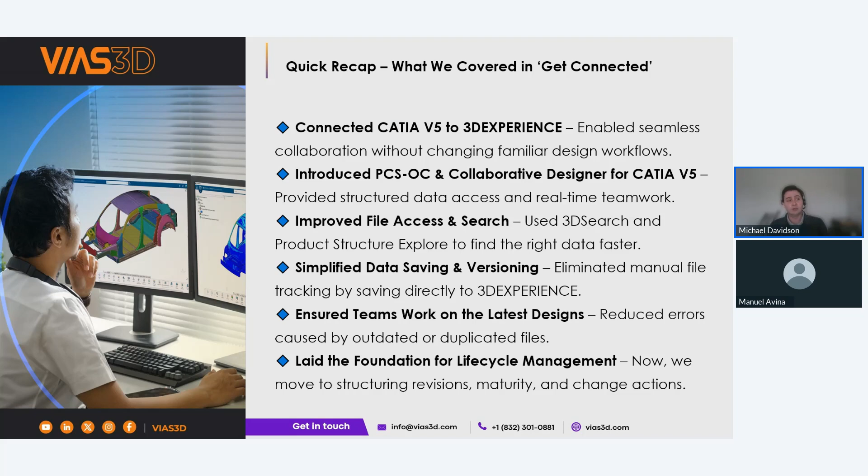You don't necessarily need to answer that or put it in chat, but I would encourage you to consider what that means - individually or as a team - how much time on a daily basis you spend searching for the right file, verifying it's the latest version, or fixing mistakes caused by outdated information. It could be anything from sending emails and waiting on responses, to IMing somebody to verify they have the right file.

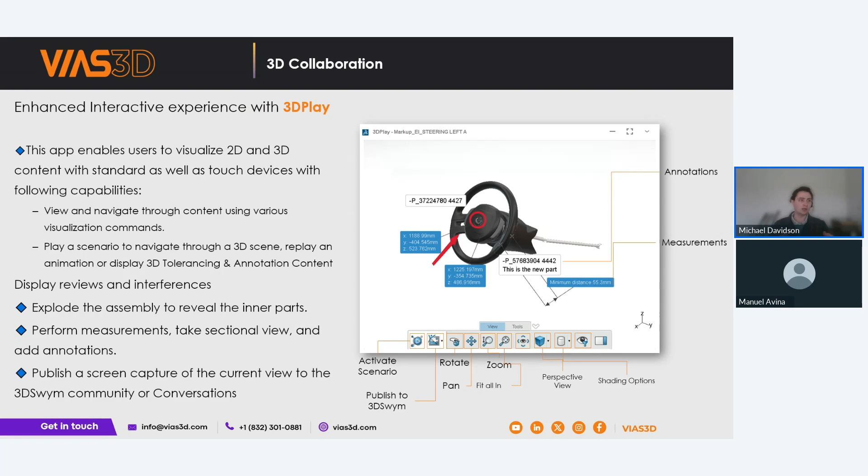So next up, we've got a short video, about 4 minutes. There's no audio to it, so I'm just going to play it and then speak to it. It's meant to demonstrate a very simple workflow related to lifecycle management.

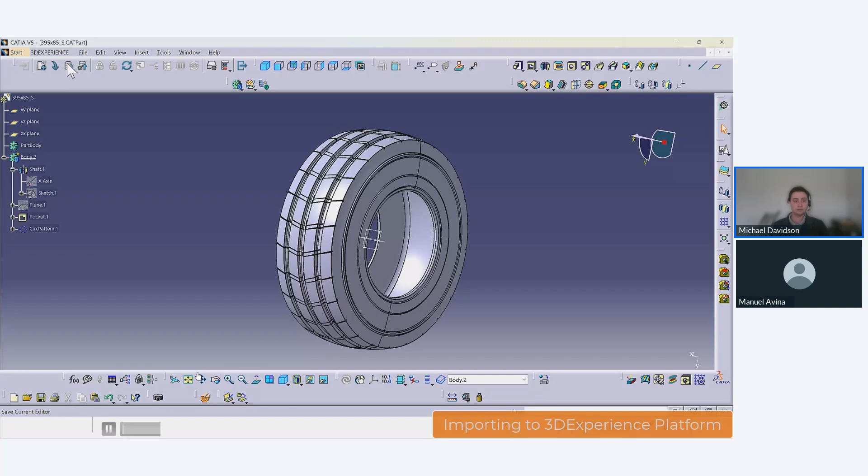It's going to begin in CATIA V5, where you're saving your data, and then it goes to the platform.

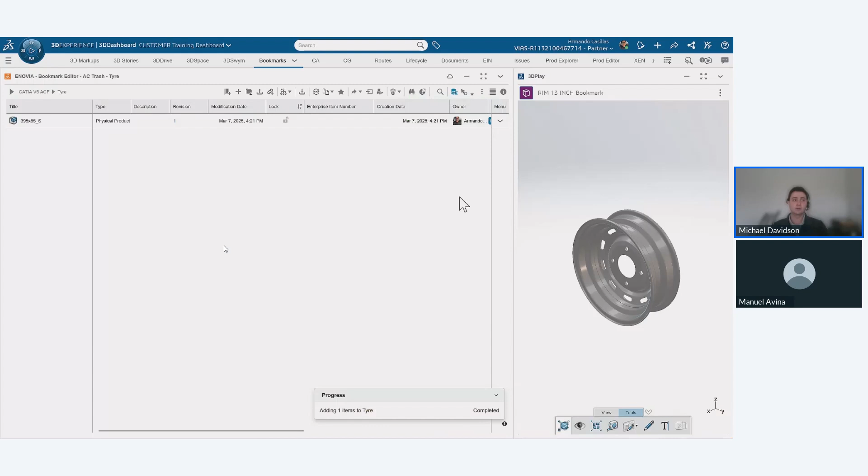When you're in the platform, you can use something like bookmarks, which gives a structured approach where you can control access to different levels of the folder structure. Then you can drag the model onto the 3DPlay widget, and a user can navigate this model and view it in this lightweight widget.

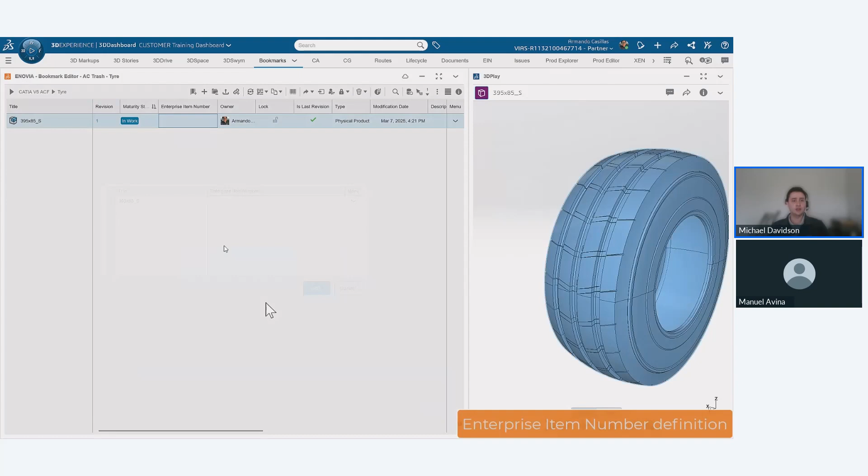If you have the right permissions, an engineer can make some attribute adjustments here in the platform, like adding an enterprise item number.

Then when they start their work, if they want to track and manage assignments, we'll show the collaborative tasks widget, where we create a task, add a description, add some other attributes, and then search for the model and add it as an attachment. This is the actual model on the platform, not a duplication.

They could add an assignee, add any supplemental documents or other things needed for context, create the task, and move it to 'to do'.

If we go to the assignee's account, we see that they get a notification that they've been assigned a task. They can open the task, see the description, all the information added, and the model that was attached.

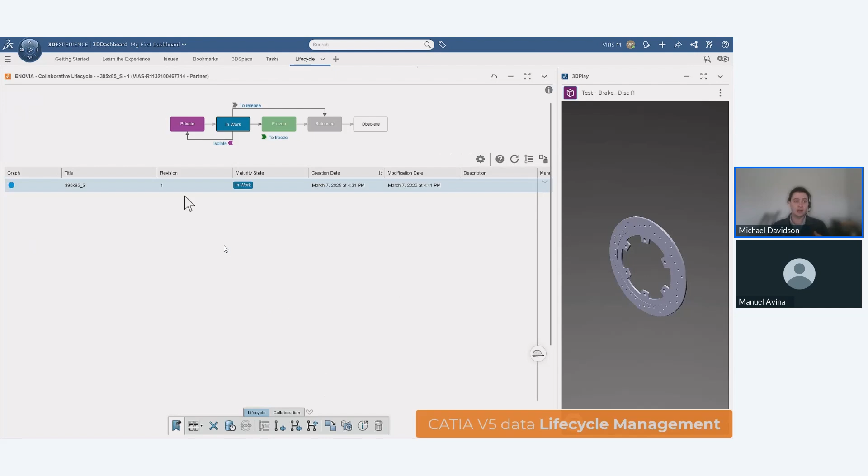They want to start work, so they move it to 'in work', and then we'll use the collaborative lifecycle widget to demonstrate some of the maturity states.

Here we've got revision 1 of the model. Let's say it's released, and we want to make an update, so we create a new revision, add a comment about what we're doing, and now we have revision 2, created as an in-work model. Now we can open it.

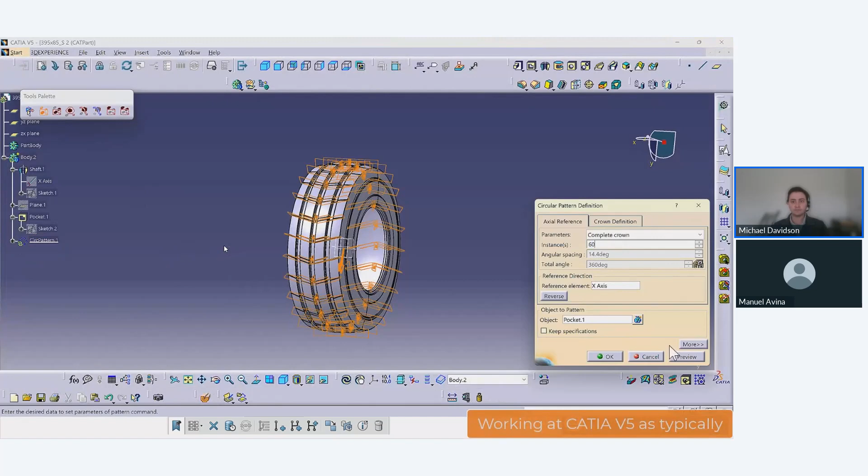We can open it directly back into CATIA V5. The part opens in V5, back to our familiar interface and the workflows we know, where we can make any updates needed. In this example, we'll just change the tread pattern of the tire.

Once we're happy with it, we save it, and it saves back to 3D Experience. Then we'll return to 3D Experience, and with a refresh, we can visualize and look at the changes.

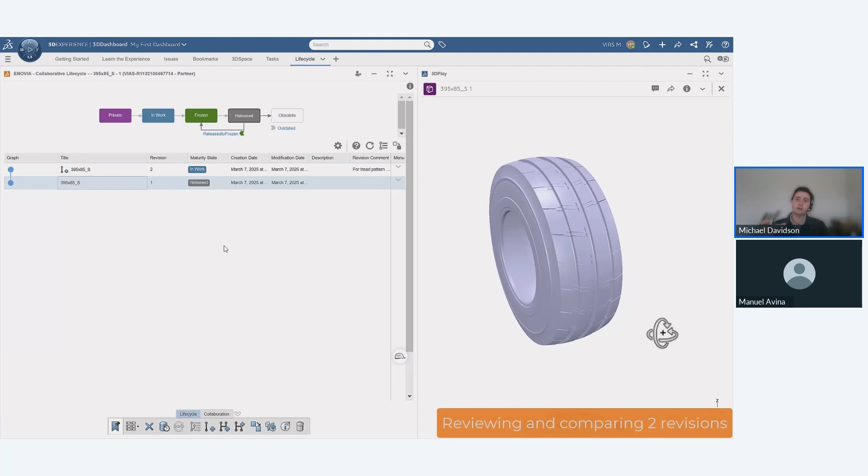Here we've got revision 1 on the 3D Play widget. We're going to drag revision 2, open it up on 3D Play, and we can see the updated model here.

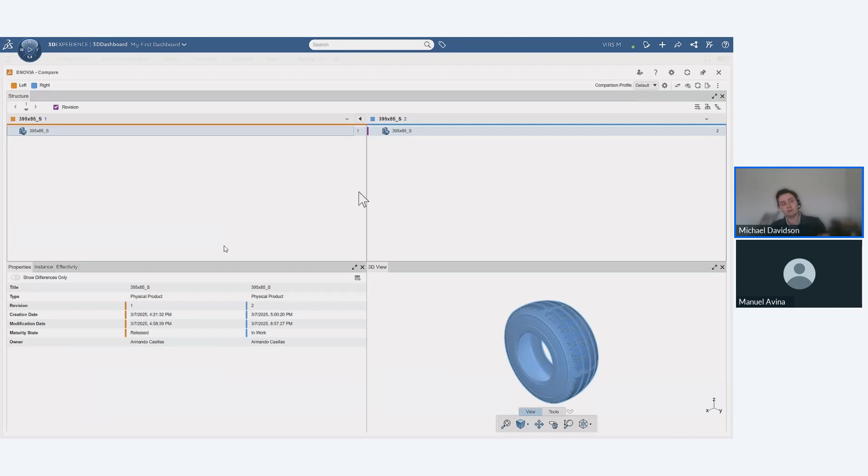We can also use some compare functionality. We click compare and select the revisions we want to see. Orange is revision 1 and blue is revision 2, so you can see the different properties. You can use 3D Play to visualize what changed between the two revisions.

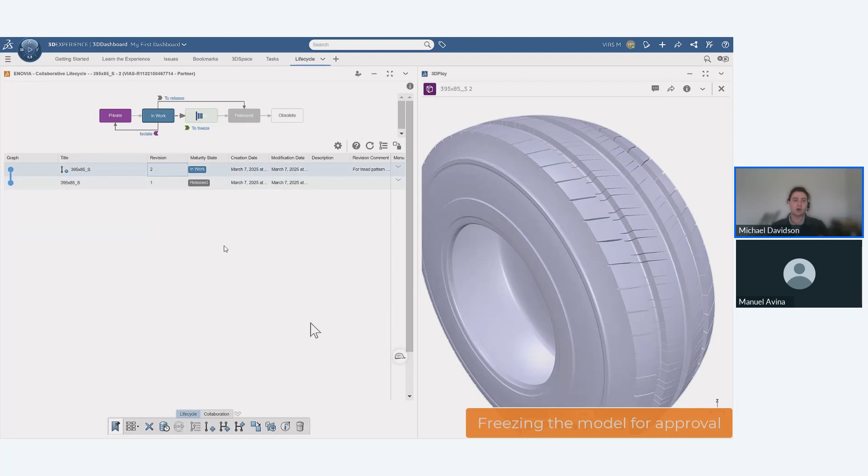Once we're happy and we've made our changes and we're ready for the approval process, we promote the part to frozen. Now it's ready for review.

We go back to our task. We can add some comments here about what was done, and we can also add any documents we need for context.

Then we add the deliverable itself. Here on the platform, we can just take revision 2 and drag and drop it.

And now it's attached as a deliverable to the task. And then we move the task to in approval. And the manager or the lead or whoever's assigned as the approver is going to get that notification.

They can go to the task. They can see the details, the comments of what was done. They can interact with it, make any comments. They can view the deliverable.

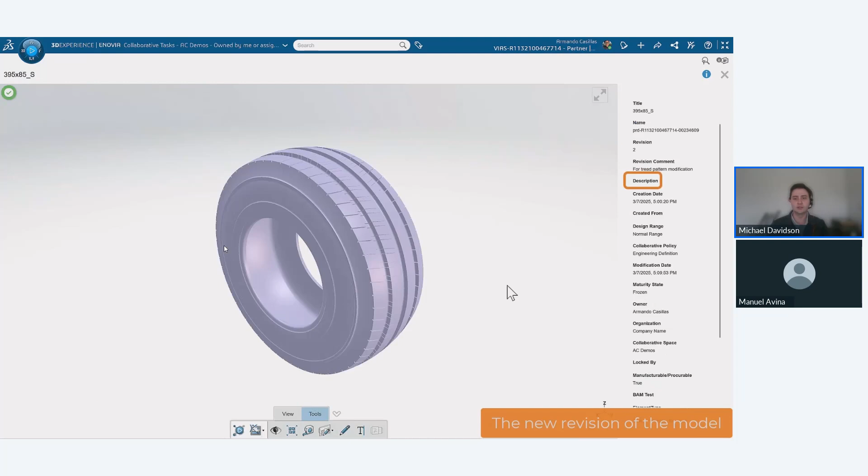And here they're just going to preview it with 3D Play. They see it's the second revision. And then they can navigate this way. They can do their design review, whatever they need to do here.

When they're happy with it, they can go ahead and now it can be released. And now you have revision 2 that's been released. And then you can close the loop and just complete that task to say it's done.

So the idea there is that it's important to note the traceability of that, right? Throughout the process, from creating the new revision all the way to the end, it's all documented on the platform and it's all connected to that CAD model. So we know when the new revision was created, who worked on it, what they did, who approved it, when it was approved, and when it was released. So we have that traceability of the updates.